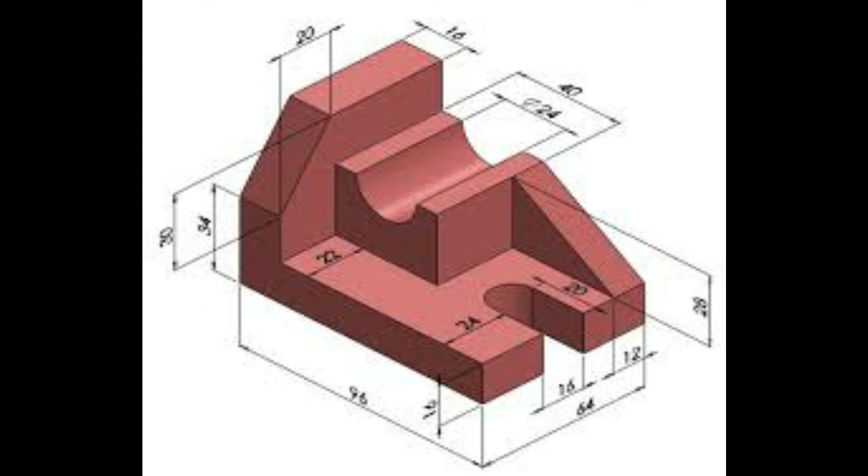Today we are going to draw this part. We are going to use simple extrude command, extrude boss base, as well as extrude cut. And here we are going to use a chamfer for this taper plane. Let me show you.

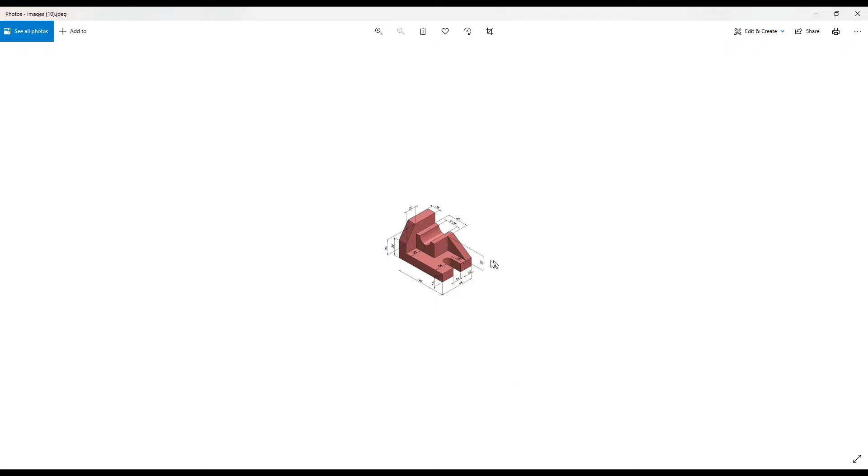This is the isometric view of our drawing from which we are going to draw.

So let's just start. First go to new, we have to draw a part. Then, first of all, I request you to stop the tutorial and imagine how you would draw this, then try to do it yourself and follow the tutorial.

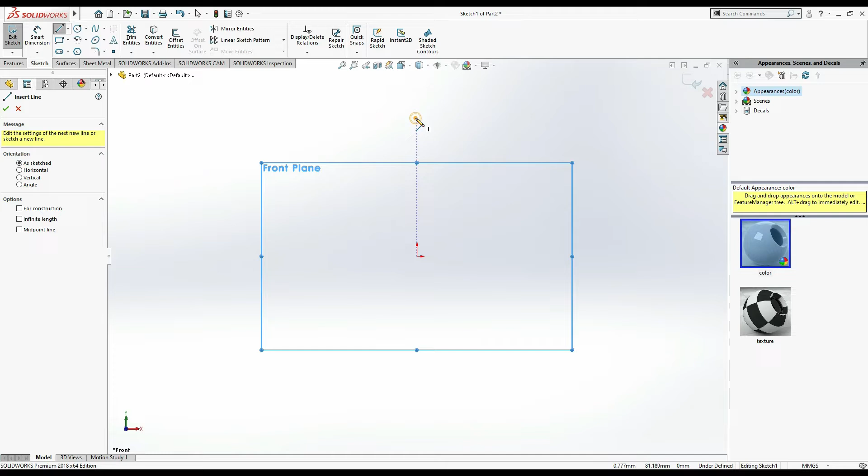Now I'm going to draw this L shape in front plane. I'm going to select front plane, sketch and line command. Vertical to the origin, I'm going to just roughly sketch an L shape here. Now press escape.

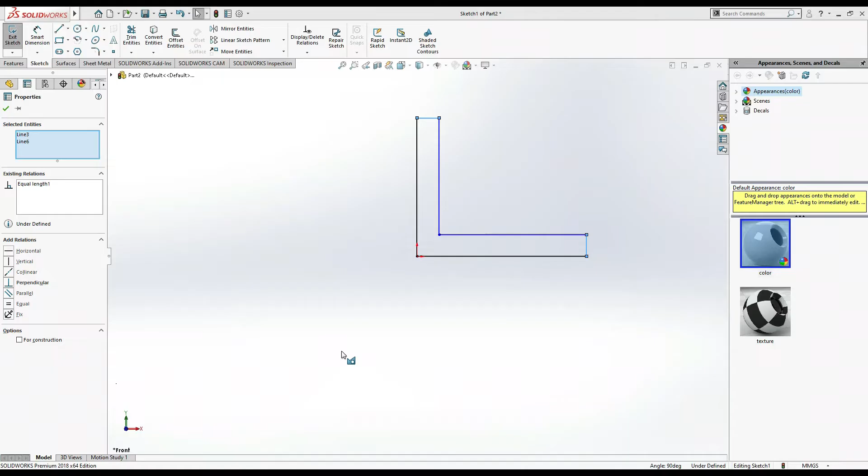Select this line, press Ctrl and select this line, and make a relation equal. Now what dimension do we have? This height is 16, smart dimension. This is of 96, and this side is 30 plus 34, meaning 64. This one is of 64.

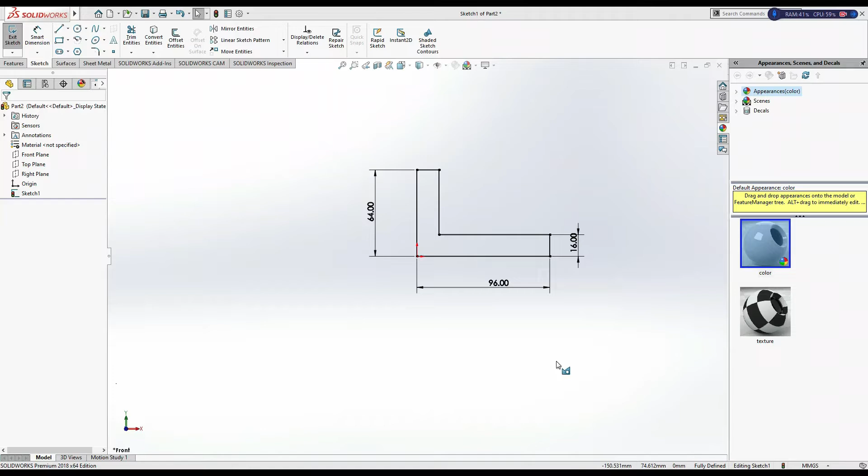Now how much do we have to extrude? If we extrude, it will be extruded on the back side. So this dimension is 64. Features, extrude boss base, and we have to extrude 64. As usual, I commonly extrude on the back side of the sketch. You may sketch in this direction, but I used to extrude on the back side or the right side.

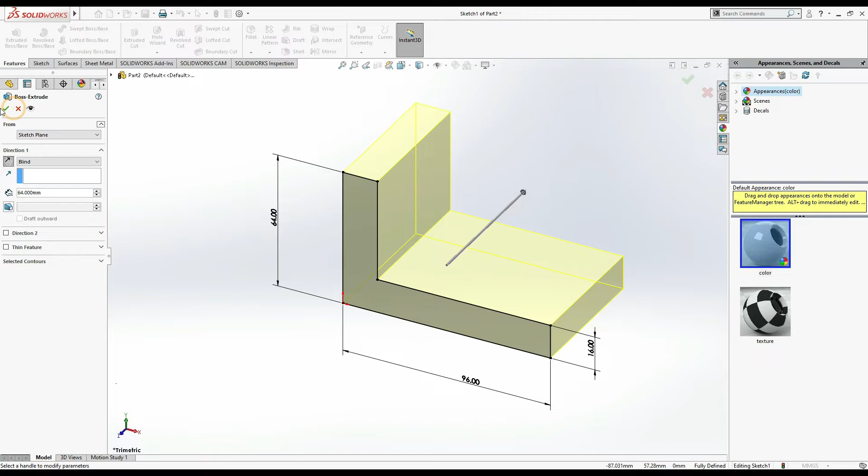Now you can see this is the taper side. From bottom it's 34 and upper side is 30, and this vertical side is cut of 30, and horizontal is of 20.

Commonly we go to chamfer, and we have used this type of chamfer. Here are 5 types of chamfer, and we are going to use this second type. This is the type where we mention two dimensions or two lengths of the sides. As I told you, this is 20 and this is 30. So we are going to use 20 and 30. Select this.

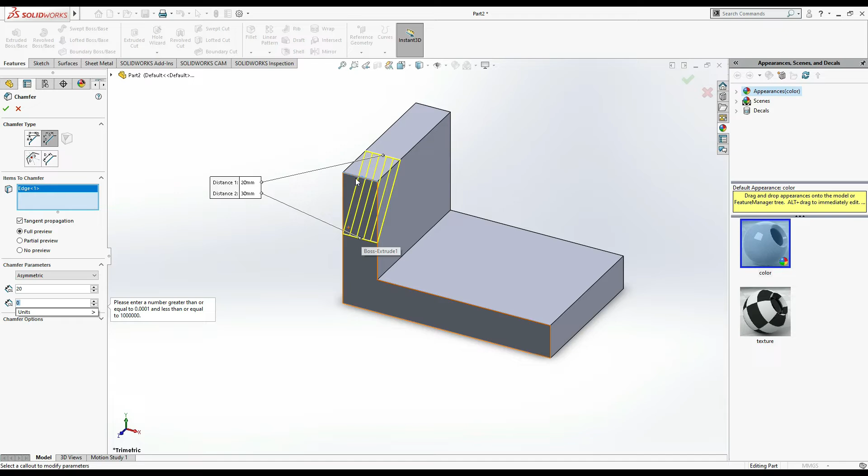So it shows, first make it 0, make it 0. Now you can see this upper dimension is the distance from this point to this edge, so I am going to mention 20, and it is 0. And this is the distance from this point to this edge, so this is 30. Okay, it's chamfered.

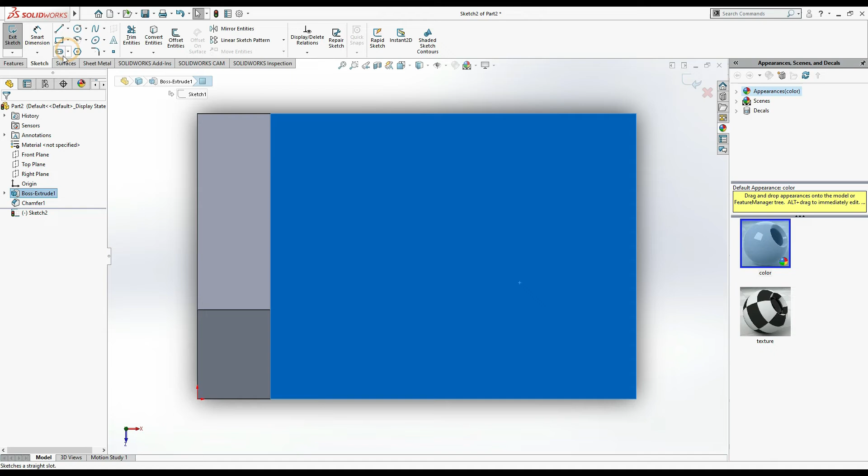Now here's a slot. How can you draw it? You can draw by selecting line, first make a line from here to here, make a semicircle, then a line. But draw it like this: select slot, find the midpoint, from the midpoint draw a slot, write this.

Now go to smart dimension. First of all, this is 20 and the dia is 16. 20 and 16 smart dimension. This side is of 20, this side is of 16. Dia is 16, so its radius must be 8.

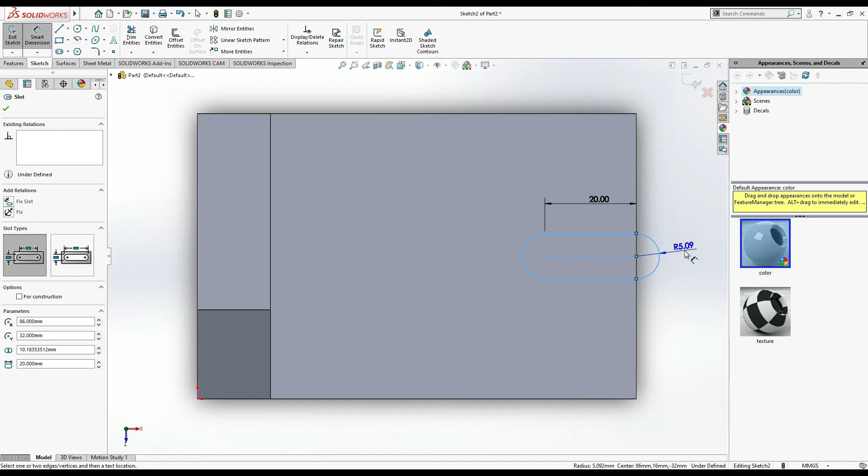Okay, now simply features, extrude cut, and you have to cut it blind or this one, or you can select through all, it's up to you, you can choose anyone. Now you can see this side and this lower side is done.

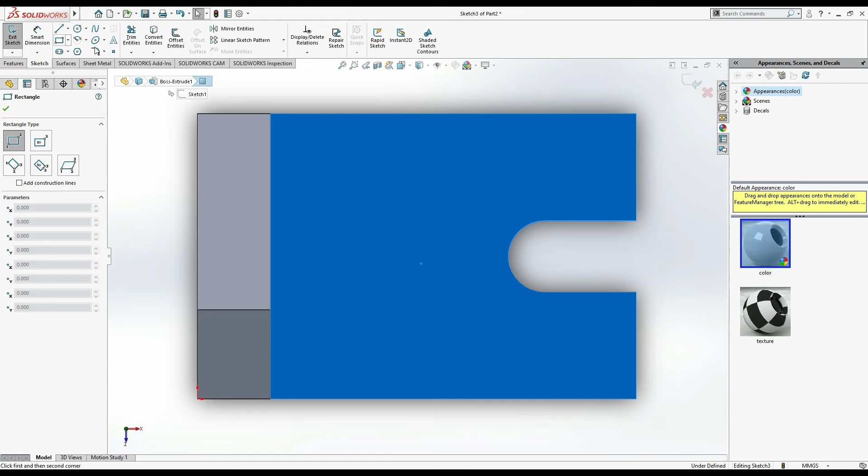We have to draw this block. How can you draw this? Simply, here's the dimension 40 by sketch, control 8, select corner rectangle. From this edge, draw this one, smart dimension. This is 40, so select this line, this is 40, and from this edge to this edge is the distance 22. Select this, select the edge line, and it is 22.

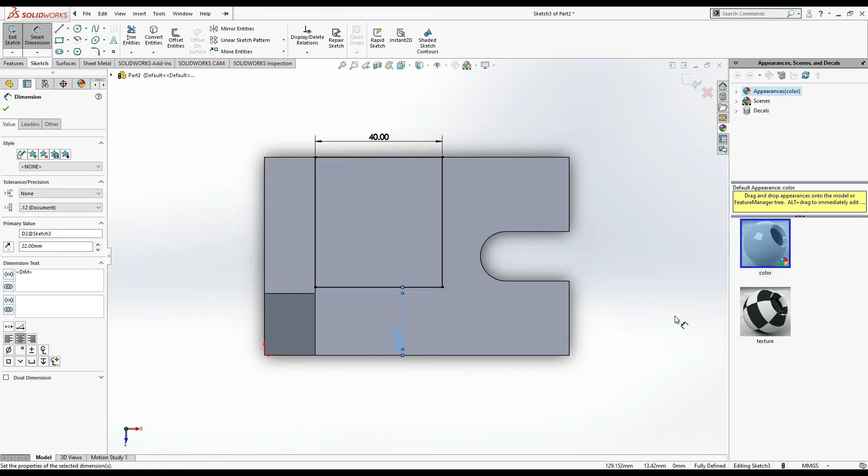Okay, simply you have to extrude it. How much? Here is the 26, so extrude it. Features, extrude. How much do you have to extrude? You have to extrude 26.

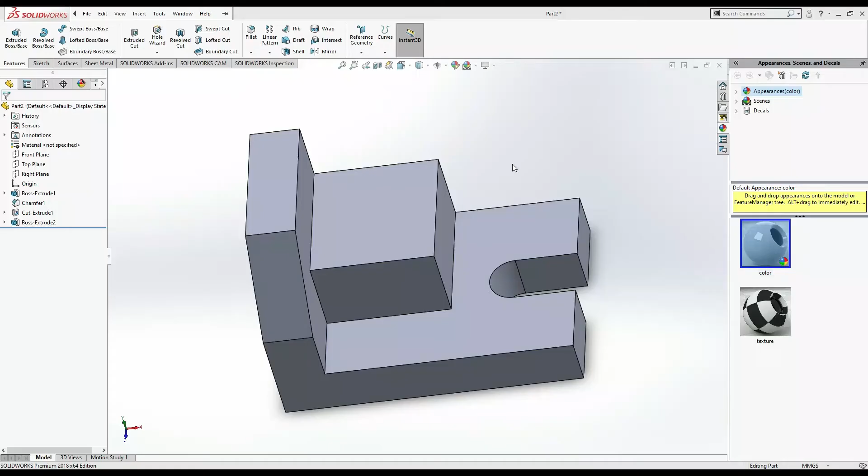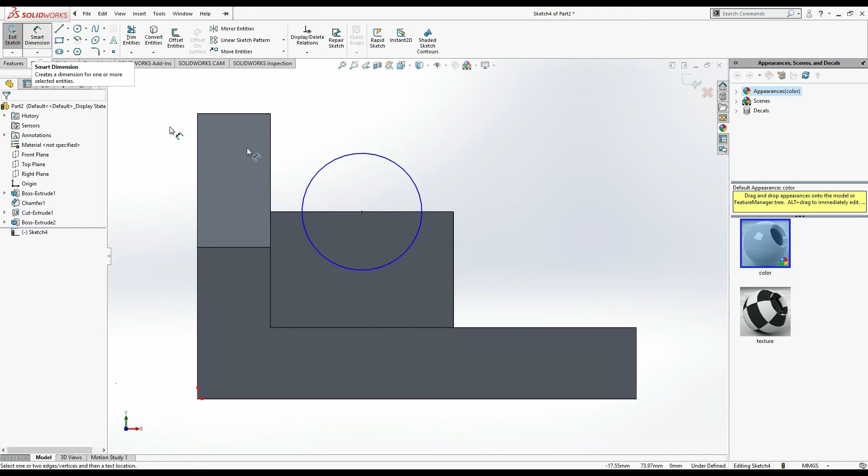Now you can see here is a semicircle, cut a whole semicircle hole. This is 24 millimeter dia. Simply select this face, sketch, or you can select the back face. Control 8, go to circle, or you can select arc, find the midpoint, make a circle of dia 24, smart dimension, its dia is 24. And now simply go to features, extrude cut, and cut up to through all.

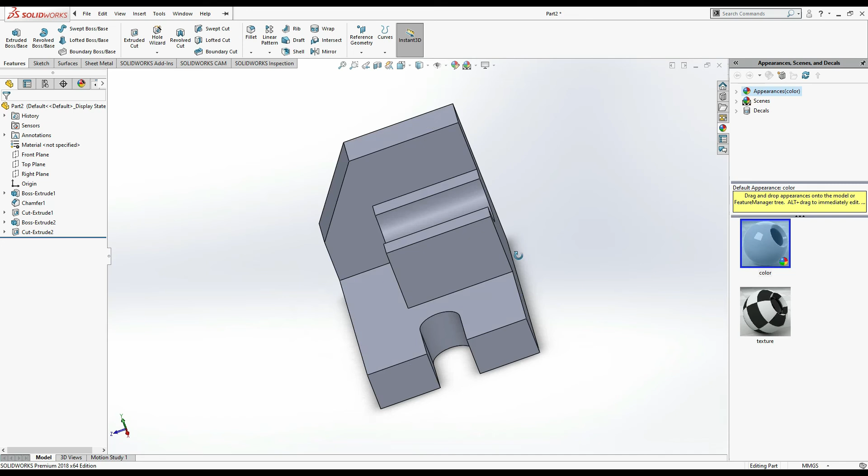It's done. Now only one thing is left, this triangle. How can you draw this triangle? Select this face, sketch, control 8, select line command. From this edge to this point, and close this triangle. Press escape.

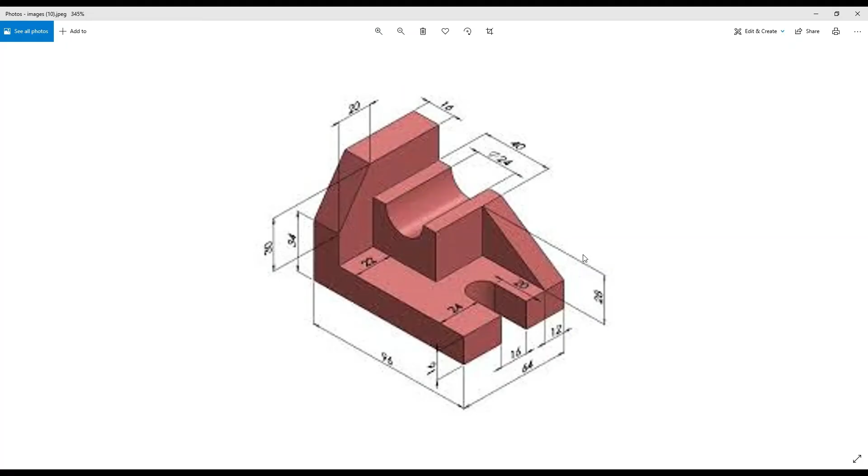Now you have to extrude it. How much? Here is the dimension 12. Features, extrude, extrude up to 12, but it's going to the backside, so click on reverse direction arrow. Now your drawing is complete.

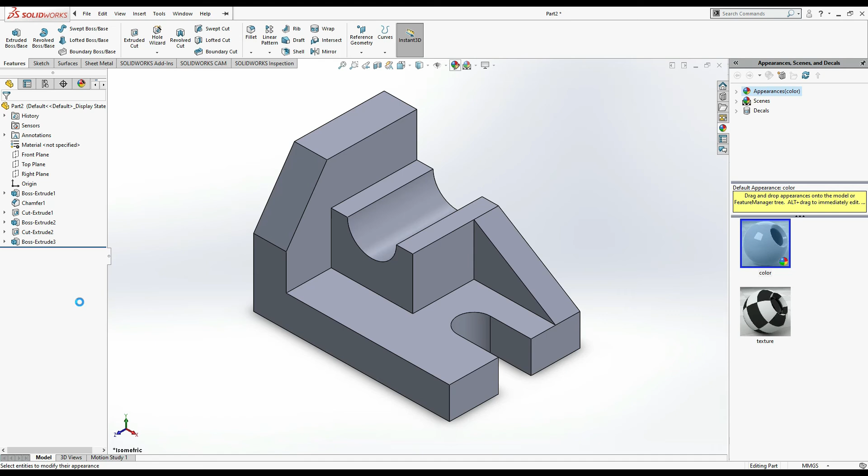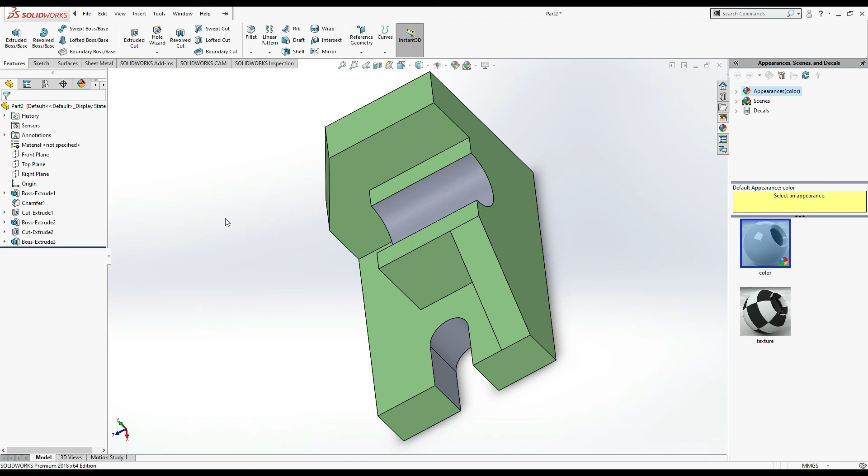Isometric view, change its appearance. Click on this, press control, click here, rotate it, press control and click here, and click on appearance. Now again isometric view, and your drawing is ready.

Hope you guys can understand this tutorial.